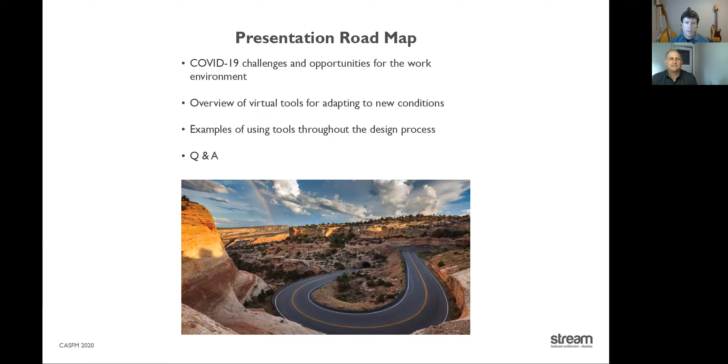From there, we will provide an overview of some key tools that we've been using to adapt and maintain a collaborative culture. Then we'll explore a few specific examples of how we've used those tools, some illustrated through video clips of collaborative meetings. While this presentation has been pre-recorded, we'll have an opportunity for a live question and answer session following the recorded portion, during which we hope to hear some of the ways your practice has evolved during the pandemic and answer any questions you may have.

So like many of you, we were forced to quickly adapt to changes associated with working remotely. One of the obvious challenges associated with shifting to a virtual work environment is not being in the same room with our colleagues and clients.

We can't read expressions, gestures, group dynamics, or body language as well over the screen. We've also lost much of the social aspect of before and after meeting chit-chat and what we would call parking lot meetings after a formal meeting, where we can informally gather and talk about our lives and project work.

We have far fewer opportunities to gather around a table for a design workshop or charrette with other consultants, and it's not feasible to hold large in-person stakeholder meetings or public open houses anymore.

As a small landscape architecture studio, we depend on the ability to visually communicate our ideas. We hover over sketches and plans together, draw, and guide staff to explore different possibilities. These over-the-shoulder reviews result in better design solutions. Working in a virtual environment forces us to look at different ways to collaborate and communicate.

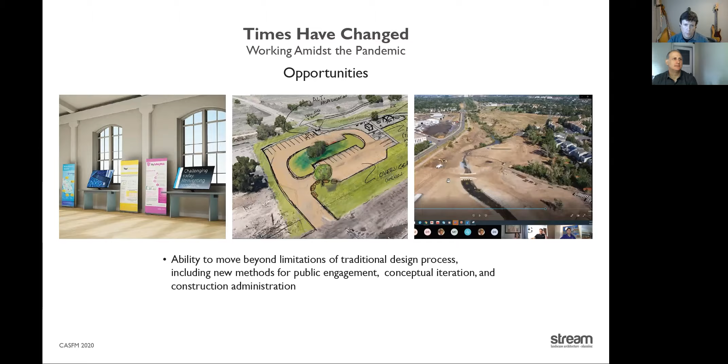We've also noticed that while working from home can sometimes be distracting, there's potential to actually increase productivity by providing flexible work hours and eliminating or reducing commute time. And the reduction of emissions associated with fewer cars on the road benefits us all. There's potential for many of these adapted work practices to carry through beyond the pandemic with positive results.

Now, Jess will walk you through some of the tools we've been using to maintain effective collaboration. Yeah, thanks, Chris. So many of the national firms and the larger businesses who have offices in other places, they've been dealing with video conferencing platforms for quite some time.

But as a small niche business who relies on in-person collaboration to result in the high quality work that's expected of us, it's a major paradigm shift for our team to use video conferencing as our primary communication platform. Particularly for working with our internal team members, because the need for drawing, and I mean hand drawing, is imperative to our design work and our process.

So today we're going to touch on how our firm has begun to use digital tablets, like an iPad, to not only replace hand drawing on paper, but to collaborate in a way unlike any that we were able to prior to the pandemic. Additionally, technology is moving really fast to help stakeholder outreach methods that are focused on providing a no-contact approach to engage people, get feedback, and communicate ideas.

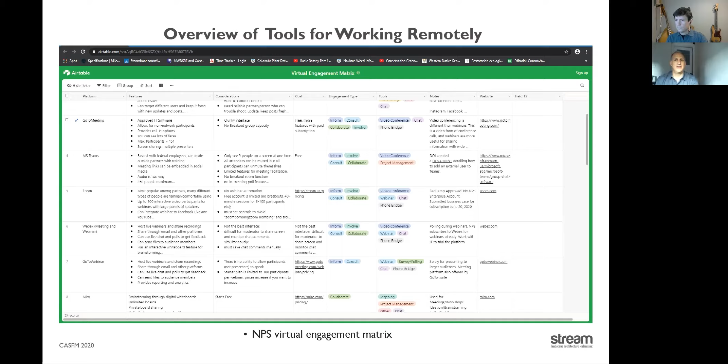Stakeholder and public engagement is really changing dramatically. We've got a lot of new tools, and this is a really positive thing. We recently hosted a public meeting where we were actually able to host a synchronized but separate Spanish-speaking feed with a live interpreter and translated materials in parallel, synchronized with our English-speaking presentation.

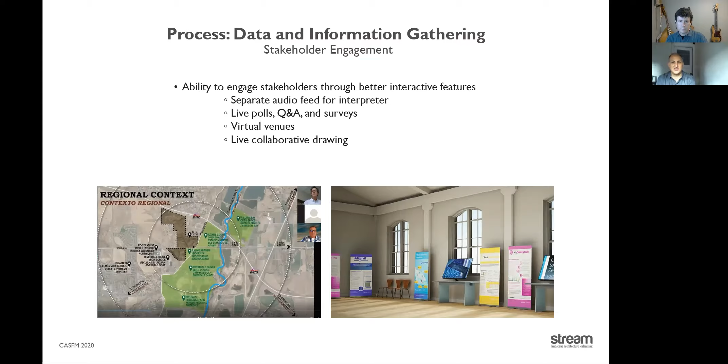On the right-hand side, there are companies that specialize in developing a virtual venue. This example is from Jacobs, and it allows a custom interface to engage people in ways that even a physical meeting couldn't before. We're even seeing a lot more people who couldn't ever attend a physical meeting able to attend. So that's very positive as well.

Let's face it, drones are kind of old news when it comes to capturing good site imagery, but we're finding new ways to use actual drone footage as opposed to Google Earth footage, like integrating drone imagery with live sketches and more detailed drawings. It's a great tool for bringing our clients along, even when we can't all be together on site.

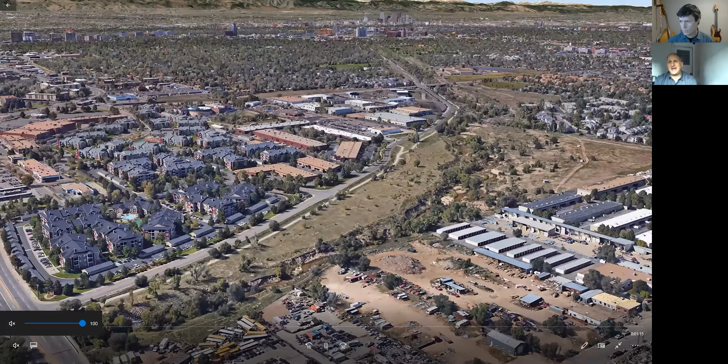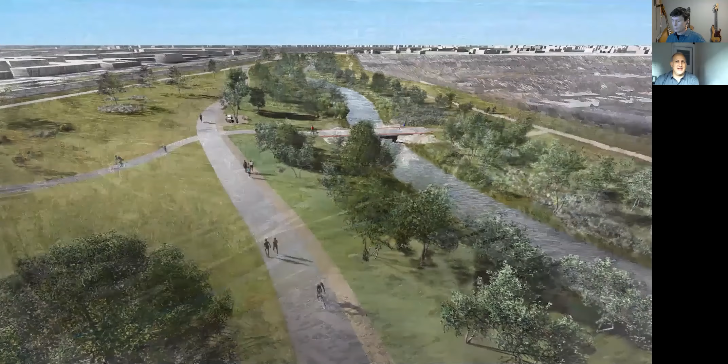Most of us are accustomed to using aerial imagery like this, commonly grabbed from Google Earth, to evaluate the site, see conditions, and even develop concepts, as we did here with this project on Cherry Creek. We've been working on this project for quite some time with Muller Engineering. We can even use this type of aerial imagery to generate lower eye-level imagery to illustrate the details and the feel we intend in the design.

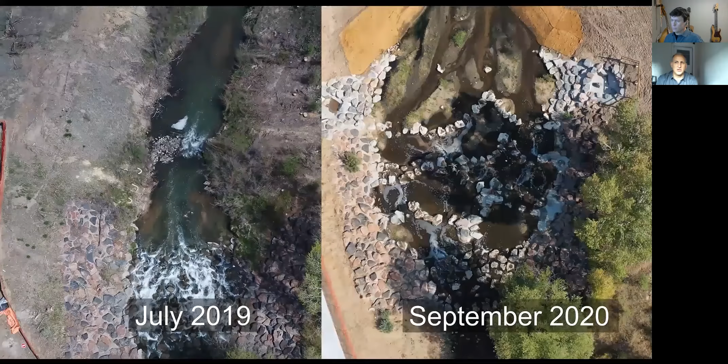But what we're not really accustomed to is using real drone footage as opposed to the Google Earth type. We're using real drone footage more frequently when we can't all meet or go to the site together. By using the exact same flight path, the aerial imagery can help from day one, providing a bird's eye view of the progress of the site all the way through construction.

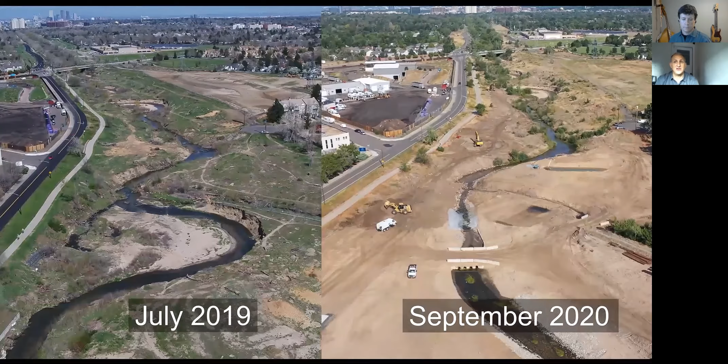On the left, you see the project just before construction began in July of 2019. The synchronized side-by-side comparison is really helpful in identifying hidden or influential site conditions and other context clues, as well as communicating real-time progress to stakeholders who want to maintain contact-free work or those who simply can't make their way out to the site. And we're going to come back to this video in a moment.

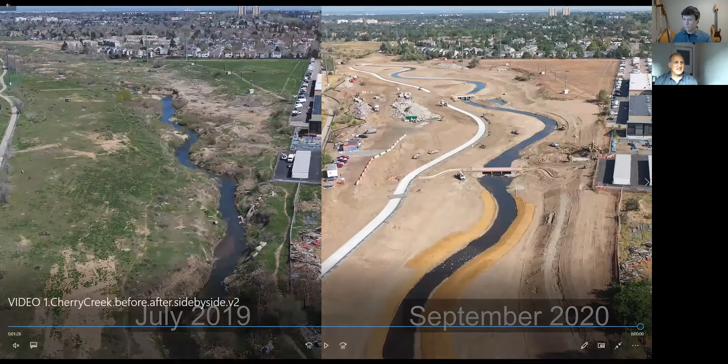Even construction administration is changing. In the last couple of weeks, I've had several FaceTime calls with construction managers to do things like see site issues. We used it once to select boulders at a quarry, and it just helps solve problems in real time. But the difference is it's in a fraction of the time. That's a real benefit now.

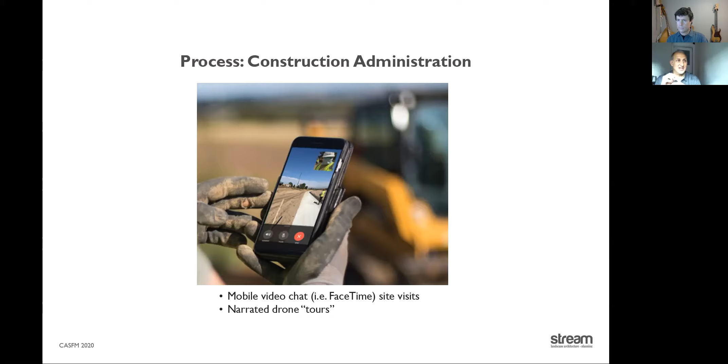Construction managers can update an entire stakeholder group, like this one for Cherry Creek, using the same footage during a Zoom meeting or a Teams meeting. In a matter of minutes, with detailed imagery and a narrated tour, they can communicate what's going on at the construction site, and people can get excited about what they've made their investment in. It's really simple, but it's very effective.

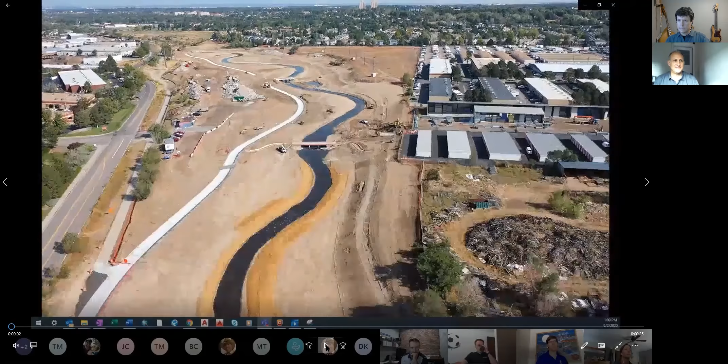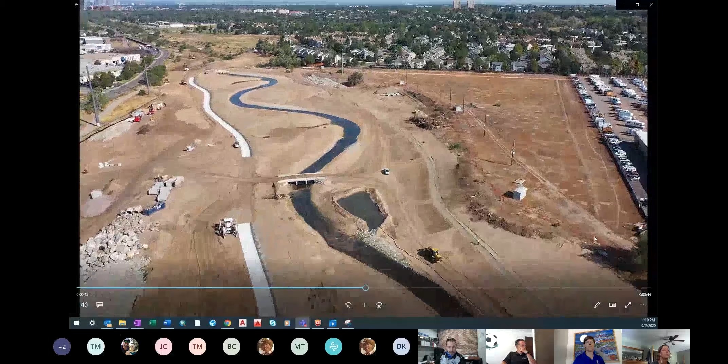That's from 20 down to 17. They're also working the irrigation on both sides. As we get down towards 17, you can see we're starting to get the trail prepped, the approaches. We've got the head wall in and the box-based manhole at outfall 9. As we continue down, you can see we've got a significant amount of trail in at this point.

Another place we've really seen some challenges, as Chris mentioned before, is in over-shoulder reviews, and in particular redlining large document sets. Some of us are actually used to redlining by hand. While you might think that's a little crazy, we found that our ability to communicate plan form changes and details is a lot better with actual hand-drawn red lines. You can also see multiple sheets at one time, which is a very difficult task on a screen.

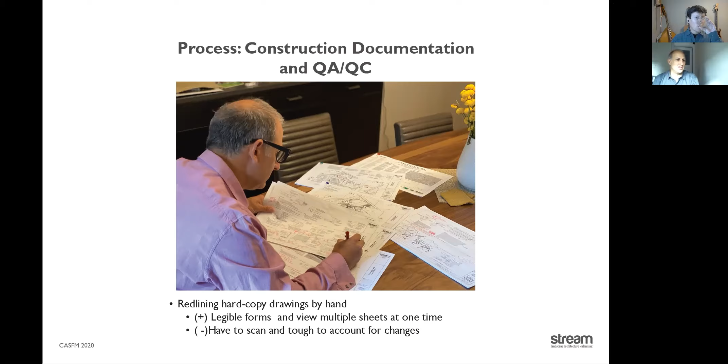The challenge when everybody's working from home is to redline a large set by hand. This set was 160 sheets or something like that. You have to scan each set every time, and it's difficult to account for changes once people are addressing those red lines.

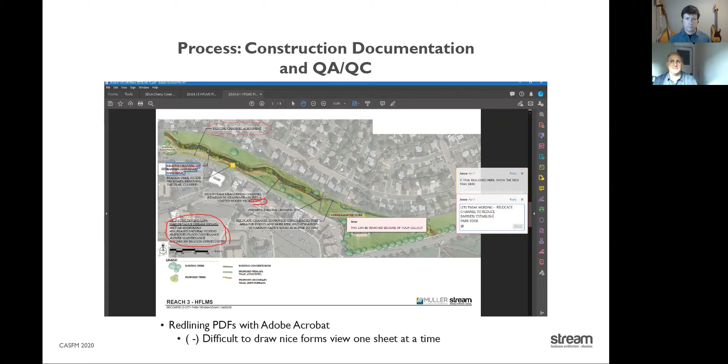With redlining in tools like Acrobat and Bluebeam, which is probably what most of us are doing these days, it works, and in smaller instances it's functional, very functional. But what we found is that the challenge of drawing with a mouse leaves a lot to be desired. It's also very difficult to see multiple sheets at one time, something that's important if you have a complex set.

So we've recently been using a hybrid method of redlining sheets on the iPad using the digital pencil. You get that benefit of the hand element and those nice clean drawings. It's recorded as a digital file, so it's a lot easier to distribute and account for changes when people are able to address them. While we don't have the ability to view multiple sheets at one time, I'll have the sheets out on my desk while I'm actually redlining the file on the iPad.

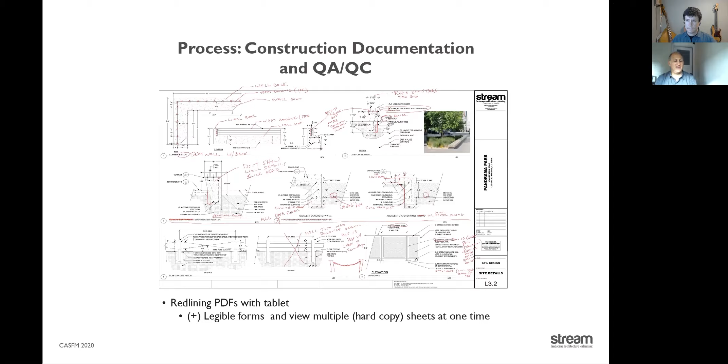Along with new ways to gather information, develop construction documents, and complete QA/QC reviews, we focused on exploring new ways to collaborate during the conceptual design phase. As designers, one of our most fundamental tools is hand sketching. There is no quicker method of channeling creative thought from brain to paper than through hand drawing.

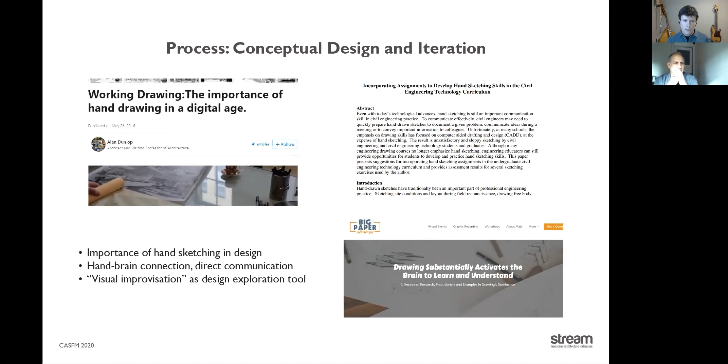One of the most important adaptations for us has been unlocking the potential of digital sketching tools. We've been using tablets and digital pencils to continue our hand sketching communications, providing staff with live feedback and exchange of visual ideas. Now we'll share some examples of collaboration by showing a few video clips.

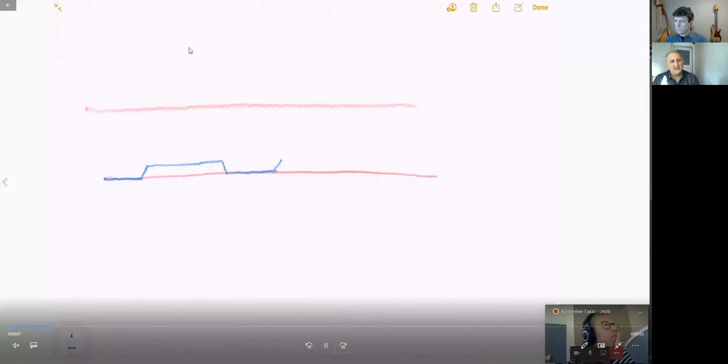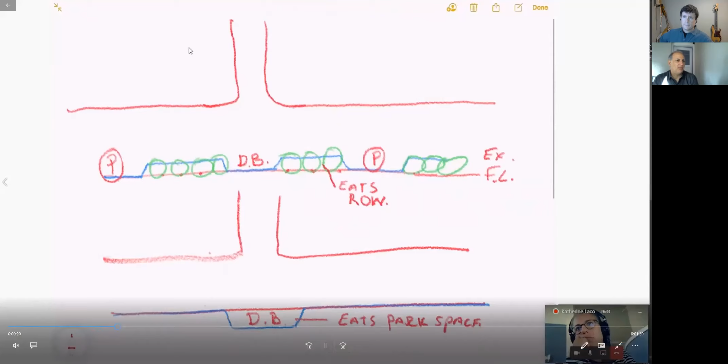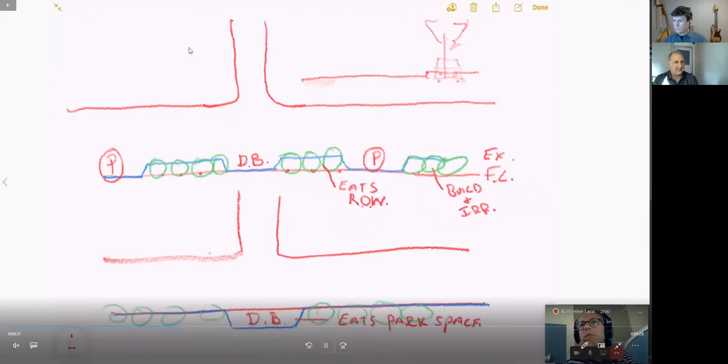Here's a couple of examples of how we've been working internally and with our design teams to use quick hand-drawn sketches to communicate ideas. In this case, I'm going through with one of our designers ways to integrate green infrastructure planting inside or outside the existing flow line. This type of quick exercise helps that designer in terms of finishing or finalizing a diagram that can be presented to the client or ownership team.

Here, we're going to look at more of a planning scale exercise, to look at realigning a channel and trail alignments along a major river corridor. We'll actually play some of the sound from this, and you can hear some of the interaction between us as we're going through the different alternatives.

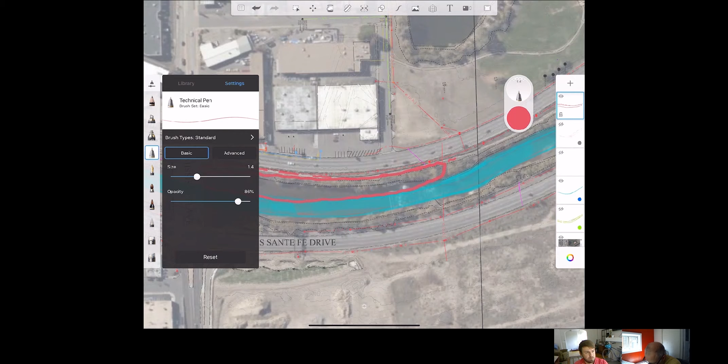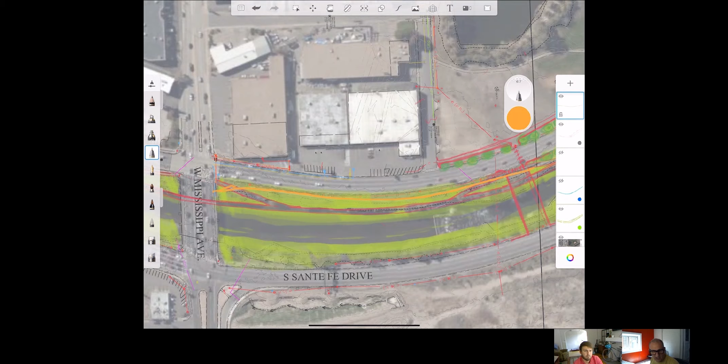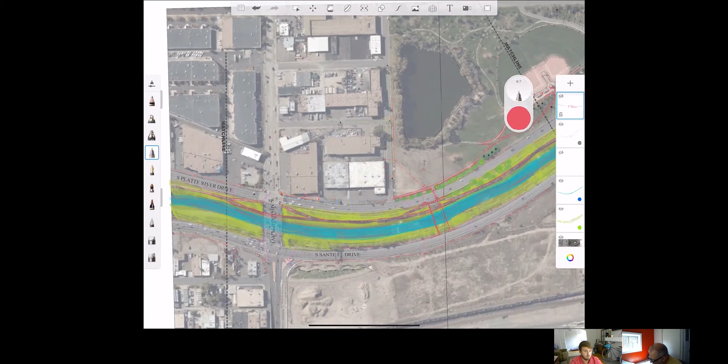You can kind of see where the other trail is, where the existing trail is, right here. So by getting our bankfull channel where the blue is, it allows us to get some recaptured flood terrace area in here. The existing trail is here, and that orange line, hopefully you can see it. The new trail is that red line there. Then what we're going to do is overlay our ideal trail alignment, which is the red outline, and I backfilled it in white so you can see it a little better. This concept would actually allow us to increase that overbank area where the road is, so we'd get significantly more flood conveyance.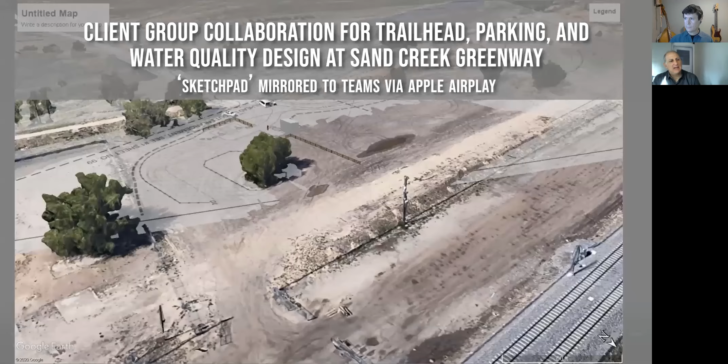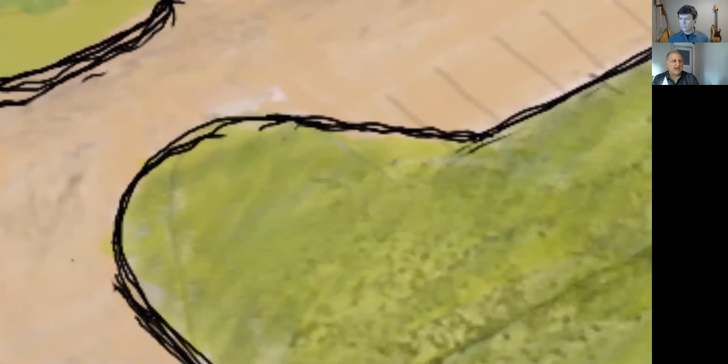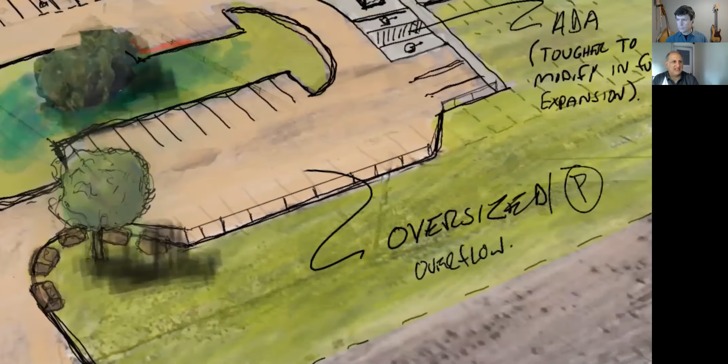In this last clip, this was a drawing that we did with the ownership team and with our collaborating consultants. We were all looking at the same screen and literally live drawing some of these elements to understand how we could integrate a trailhead and a parking area into an open space recreation area. At the end, you'll see some finalization there for rendering this to make it a little more colorful and understandable.

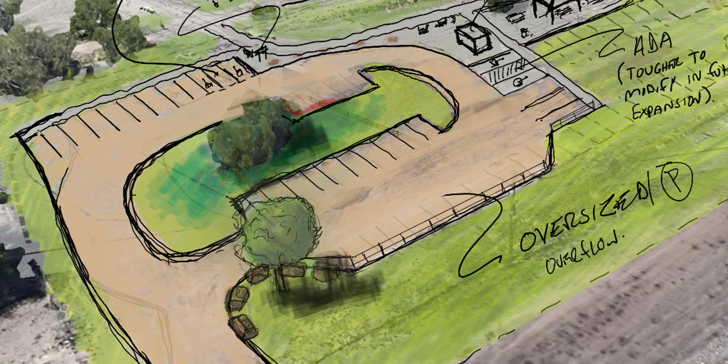Shifting to a virtual work environment has also taken the advantages of hand sketching a step further by allowing us to simultaneously sketch in the same digital space. This real-time collaboration instantly generates new ideas and allows us to feed off of one another's creative instincts.

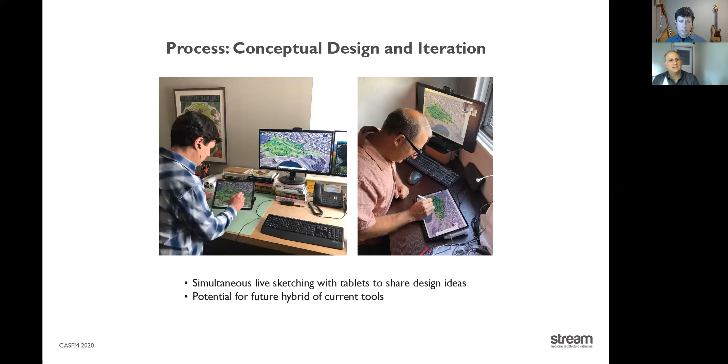While we've taken advantage of the tools currently available, we look forward to future applications that will combine a full suite of drawing tools with a live virtual space, analogous to a giant roll of trace paper. The following video examples illustrate the benefits of live sketching and also demonstrate the potential for these tools to evolve and improve.

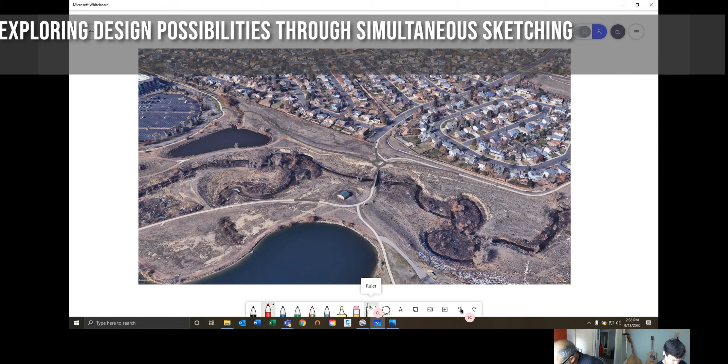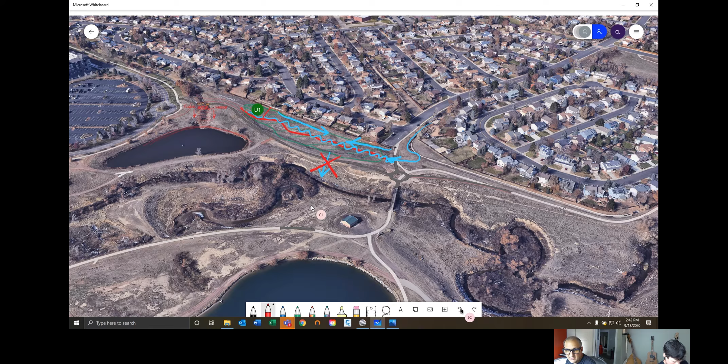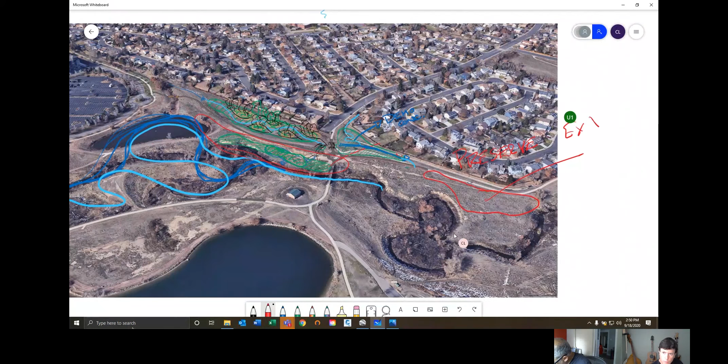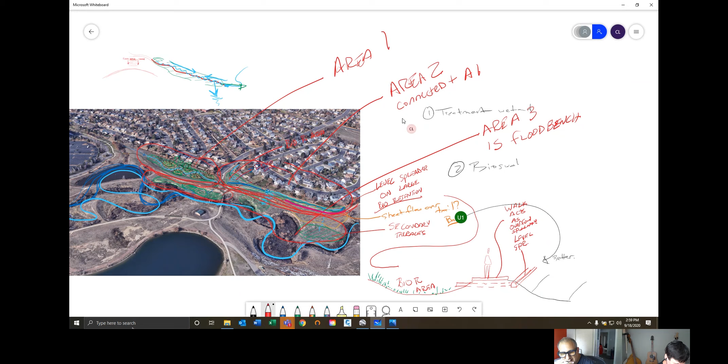All right, okay, so where do we want to look? I'll just give you the quick and dirty of what I was thinking. And if you wanted to, you could get another terrace down there, another treatment cell, a wetland feature. This part would come through and you would essentially have a level spreader here. There's some detail in here. I could take that. Do you want to do anything over here with this rundown? Yeah, I'd like to do something in that rundown area, and then we can kind of see how that all plays in.

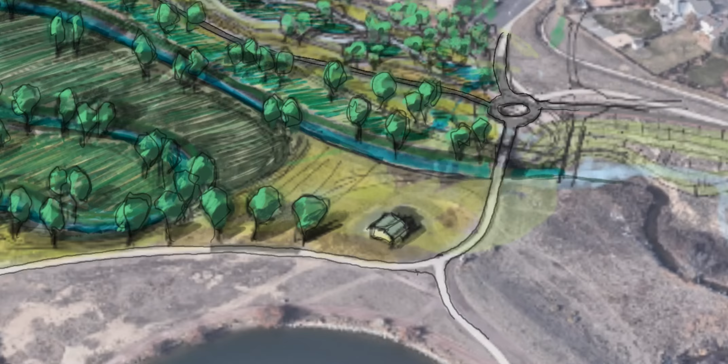So we find that with this iterative drawing process and the ability to do this online with our collaborating partners, whether they're internal or external, it really follows the level of design. Our drawings can continue to develop with the technical accuracy of the design itself.

For instance, this drawing here would be down the line, but is further developed so that you can understand how Westerly Creek will be reconfigured around the Stanley Marketplace area.

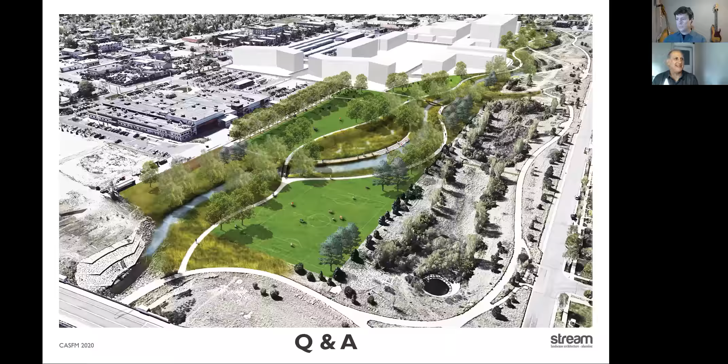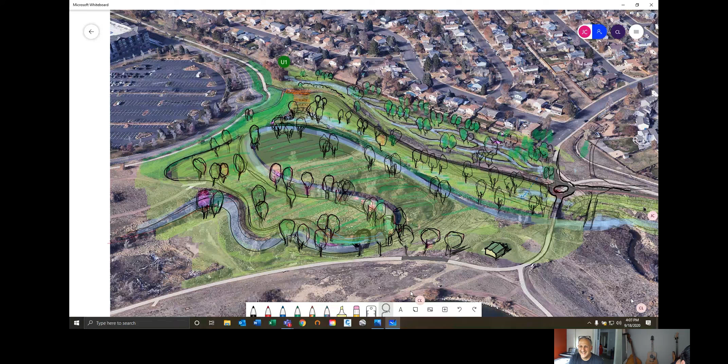All right, well, I'm going to stop recording then. Okay, just going to keep drawing till Monday. The recording is stopping. Okay.